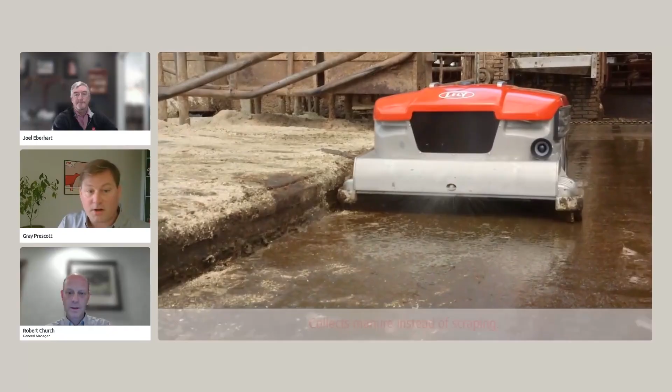Now, guys, I'm going to play a little animation because we're going to start by explaining how the collector works. I think a lot of people watching today are probably familiar with the collector, but in case someone's asking, what is a collector, what does it even do—Joel and Bob, feel free to join me here as I speak over this animation. I really want to give our watchers an idea of how the machine works.

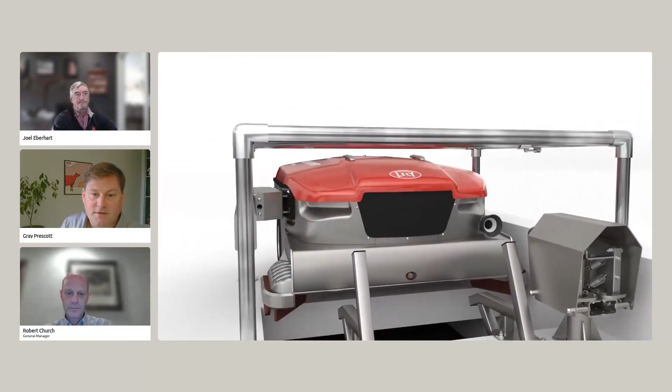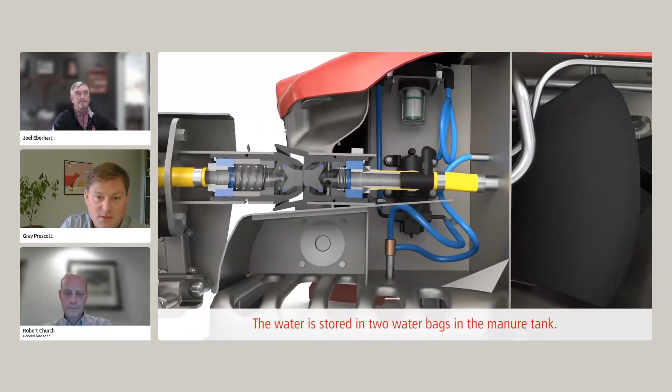Here we can see an animation of it coming into a dump hole, as we would call it—that's kind of home base for the machine. That's where it's going to charge its battery and where it's going to fill up its water bags. We can see it here docking with the water fill station, filling its water bags.

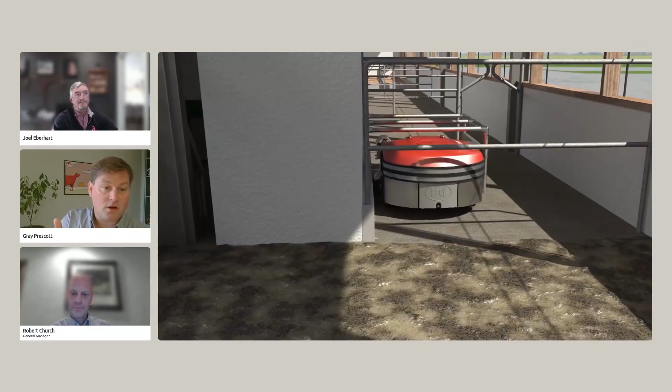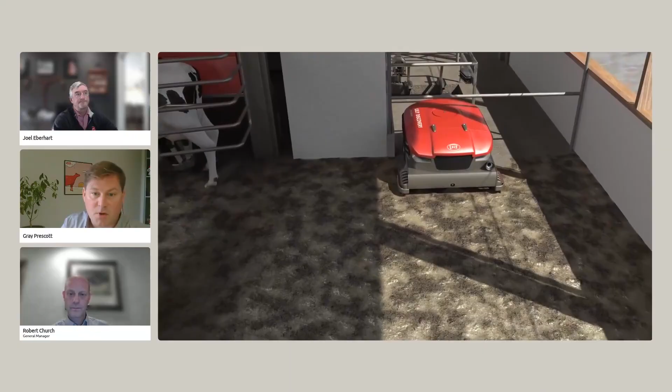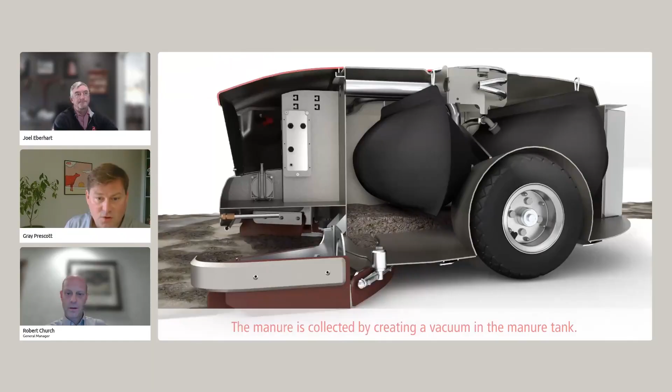As we see it drive through the barn, we're going to see it spraying water in front of it to liquefy any dry solids it finds, and spray behind it so the floor doesn't dry out between its trips through the barn. So the biggest difference we're going to see with the collector versus any other automated way of cleaning your barn is that this machine does not push the manure to the end of the barn into a hole—it drives and it picks it up.

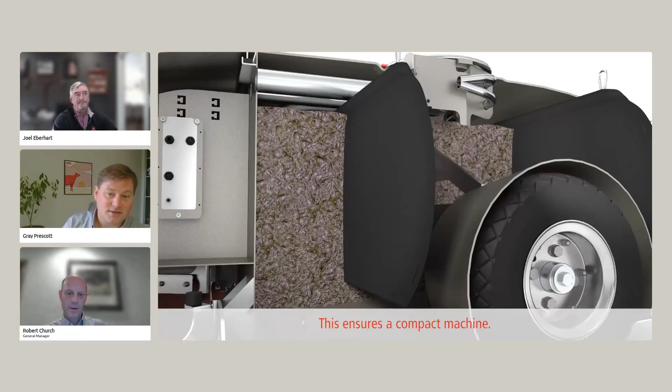That's what this animation is trying to get across. There could be manure in front of it, and after it goes by, there's nothing behind it, because that manure is in fact going into the tank. It's using a vacuum pump to hold the manure there, but the force coming from the drive wheels pushing into the manure is actually a lot of the force that collects it, right?

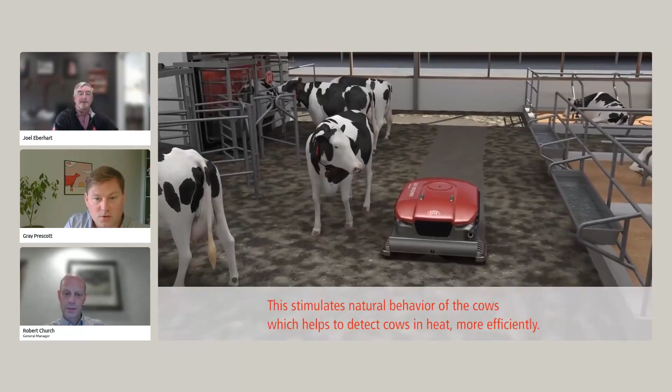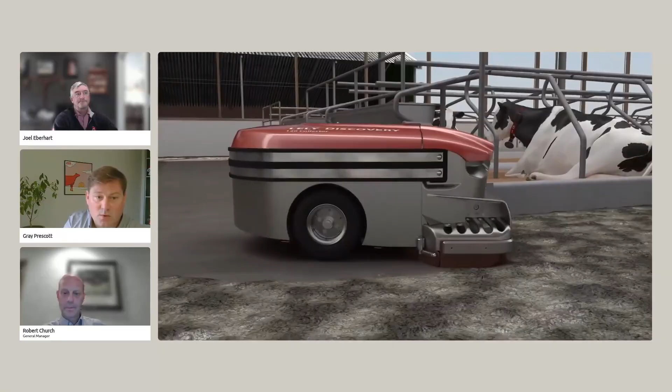We're spraying behind it. I thought there was value in showing this animation because, as you can see here, this collector is driving through an area with cows in it. Just like in real life, cows can stand there and let it go beside them, as opposed to a blade that's the whole width of the alley that's going to go down and disturb every cow that it passes.

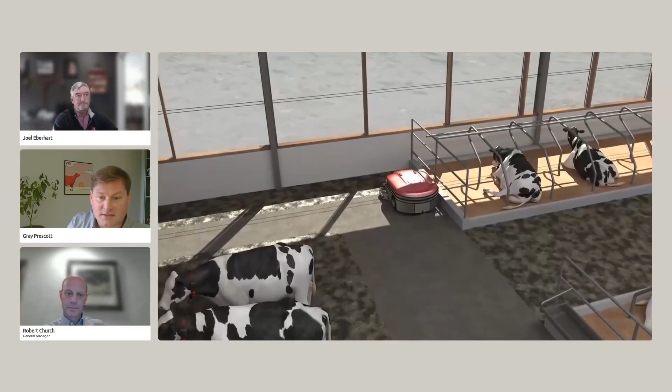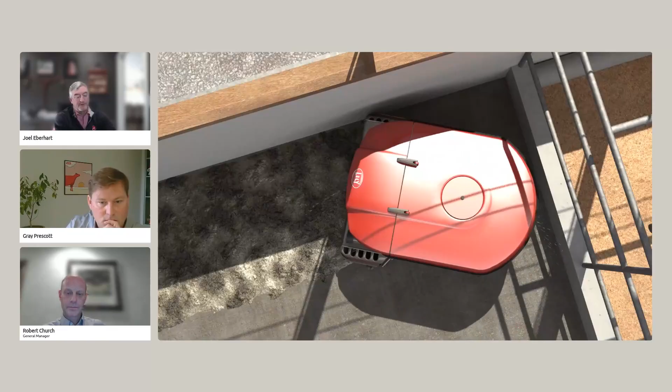I think that bears talking about too. Lely, in general, for the products we have in our portfolio for the dairy sector, we look at these things a little differently and design them such that it's through the lens or the eye of a cow. It is in there, living in their environment.

Bob, I don't know about you, but cows don't necessarily like loud, big, large things. So small things that are autonomous and can live in their environment, we think about those a little bit differently. It's something that's in our DNA, thinking about it not necessarily from a people standpoint, but from a cow standpoint.

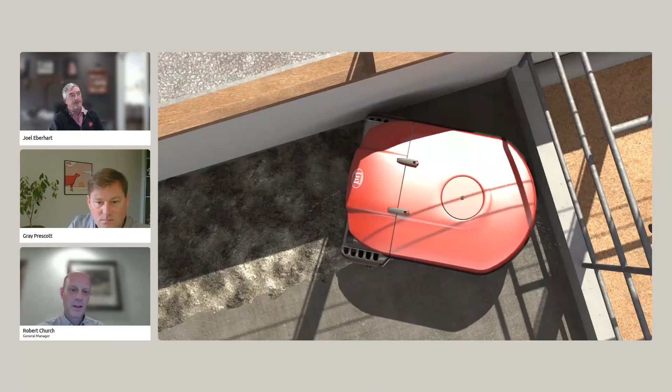Yes, Joel, you're spot on with that. The narrower width allows us to do some programming to keep it away from the headlocks during feeding time, and there are some advantages that a bigger machine wouldn't be able to work as well with.

And one more, and we'll talk over each other through the next hour, which is awesome. Everybody's got a lot to say, and there's some really cool things, but I think the first thing we talked about when you were explaining the features or benefits or topics we want to cover, Gray, and you did briefly hit on it in this narration, it's a vacuum technology.

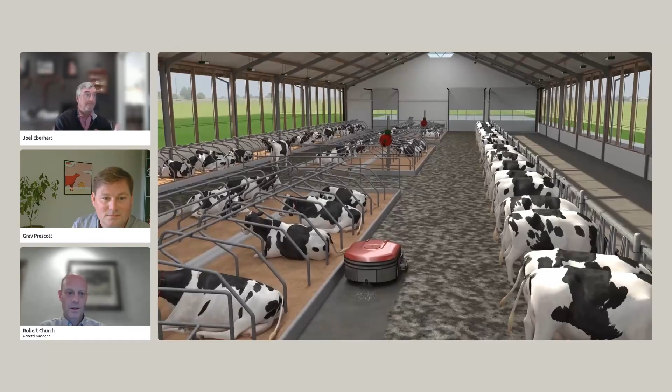We tried a lot of different technologies of gathering manure into a vessel, physical ways with beaters, bars, different ways of collecting, but settled on the vacuum as a gentler, easier way to get manure picked up. From a wear standpoint, it certainly has a bearing on the longevity of the collector, because the moving parts aren't touching the manure.

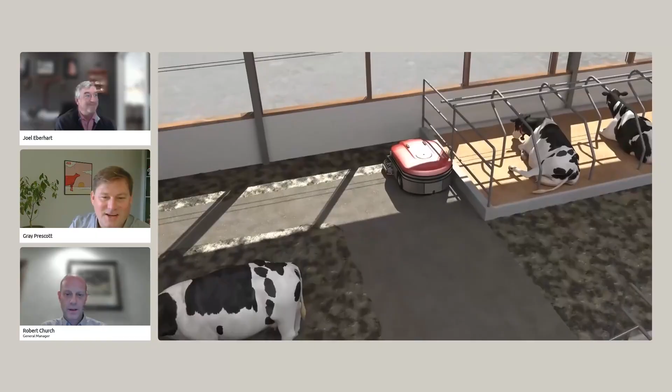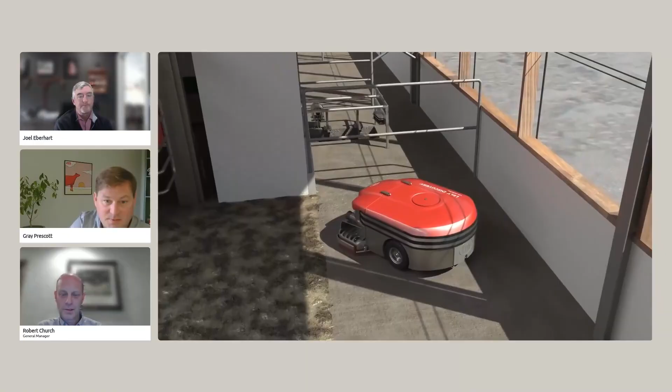Right on. Anyway, keep playing the video. We'll keep talking. The next good topic is it drives into corners, right? It has a flat front and a round back. My experience has been that it's pretty impressive at how well it cleans out the corners of the barn, actually cleaning every square foot where the cows live.

Bob, you visit a lot more farms day to day than I do. How have you found it to be in places like it just showed in the animation, when it goes into a corner? Yeah, as long as our bump stops are right and they're high enough, it does just as it showed. I've got a lot of barns where there's literally no hand scraping at all that has to happen.

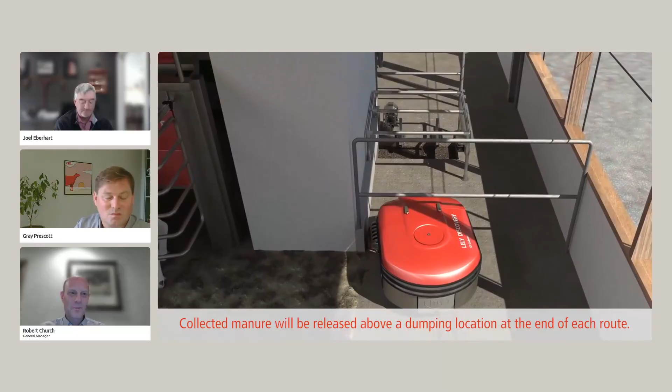With alley scrapers, there's always that little bit of scraping that has to happen at the end of the barns a couple times a day. Hopefully it happens a couple times a day, but we all know it doesn't most of the time. This just takes care of that.

When we first started them, I wasn't sure if it would still require some manual work in some of those tighter spots. So far, thank goodness for my guys that program them, they do a great job, and there's almost no hand scraping in these barns.

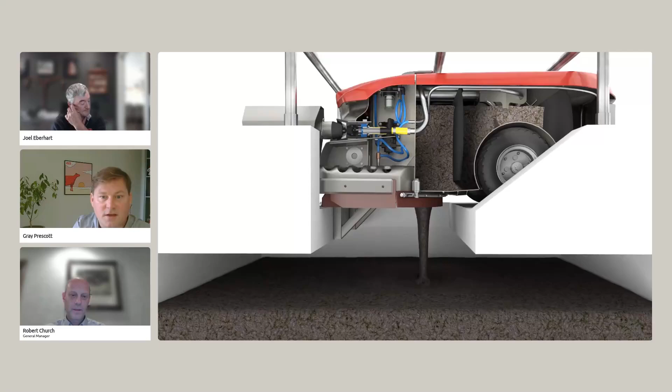I think that's awesome. And that's, to me, one of the biggest differences between the Lely Collector and any other way you might consider to clean your barn. To me, it's true automation, and it's very in line with the Lely philosophies for feeding and milking as well.

You can see here how it evacuates the tank. It simply turns off the vacuum pump. Luckily, gravity's always on, so out it goes. It sprays water behind it, trying to end up with an ideal level of moistness on the floor so that when it comes back around it can turn the manure and bedding into a slurry and pick it up.

So that's it for the animation. I just wanted to give some visuals for those joining who are new to the collector, because the three of us know the subject matter very well, and we're probably going to be talking really in depth about it.

So I wanted to go back and take that sky high view of it.

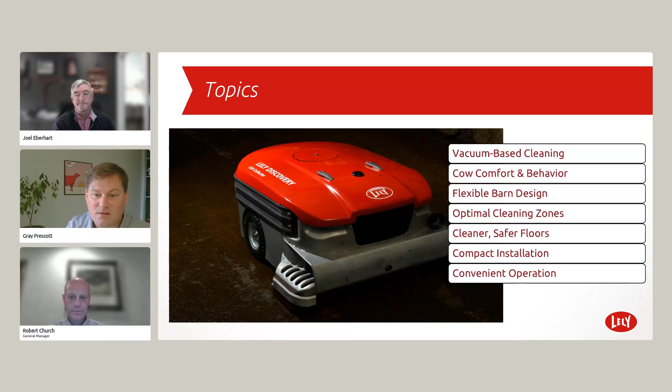The first one being vacuum-based cleaning, where we're talking about the real difference of actually picking up the manure and taking it out of the barn instead of pushing it all to one end.

How has it been in your experience, Bob, explaining that to new customers or potential customers? Is this idea kind of different than what people traditionally know, the tried and true scraping, whether on a tractor or with an automatic scraper? Here we're going to a different approach. How's that received?

Yeah, it's been received well. We did a couple startups, and guys would ask me, do we start up the milking robots, do you want the collectors running? The first time I said, no, I don't think I do, let's not get too crazy. Then the second one I did, I said sure, turn them on. Worst case scenario, we'll turn them off, right, if the cows go freaking out.

But that never happened. The cows didn't really react, they just kind of walk around them and sniff them and lick them like cows do. We turned them on right at the beginning, and they're still running today. So I was surprised by that. I thought maybe the cows would bunch down at the end of the barn or something like that, but it didn't happen. Now I want them running every startup.

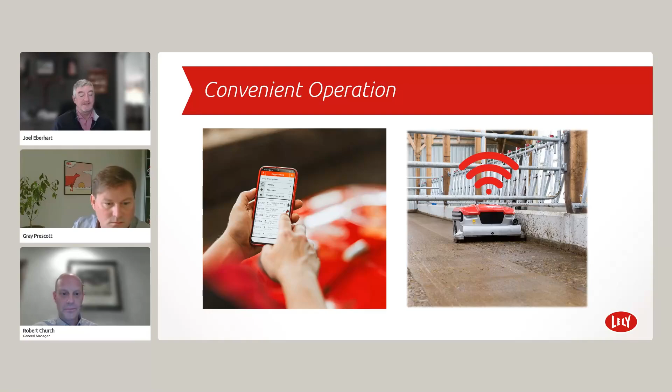Here's a good one: if it sucks up shavings or feed, does it get clogged easily? I haven't seen that happen very much. I'd say long straw or something like that would be a problem, but with shavings I haven't seen any issues, and I haven't heard of any problems with that either. We've seen about everything, but that's right.

That applies to all different kinds of materials, whether it's sand, wood shavings, or newspaper - all kinds of things as long as it meets that size criteria. In my opinion - I don't know what you think. Yeah, I agree completely. The only thing I've seen problems with is cow cleanings. Yeah, they do that - don't do that. It'll suck that up, and it doesn't always come out easy.

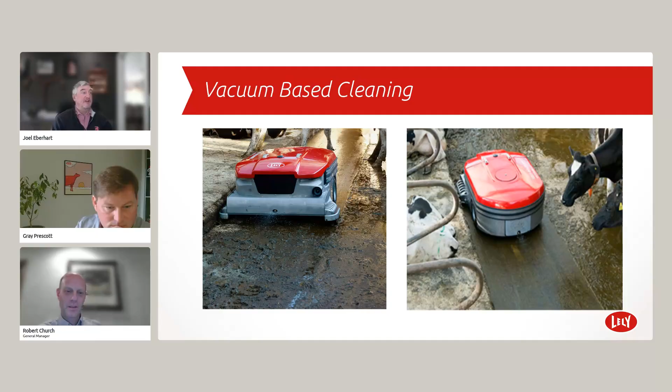So I think we covered the bedding material, sand, and power. Power is just really only 110, 120 volts, right? Because all we're doing is charging a battery.

We have ambitions to cover details of the installation. I'd say it's a compact installation, but in addition to the size requirements, the power and water requirements are important to producers too. Bob, these pictures are both projects of yours, right? Lamar Farm, yeah, they look familiar to me anyways - let's put it that way. What did these guys need?

So looking at the one on the left, it's the C2, the newest version with wireless charging. What did the farmer need to provide to set that collector up? Well, this was partly a new barn construction, so we had the perfect scenario to do the installation. When we spec'd it out, we had a water line that feeds that header tank, and that becomes the water fill for it, so it fills the collector from that header tank.

So your water line, I'm guessing, doesn't have to be high flow. No, we're trying not to - it's just a pretty small line actually going in because it's got plenty of time to fill. And then the electric power, I think it's a 30 amp breaker we're putting it on, and it's 110 volts, and it just charges.

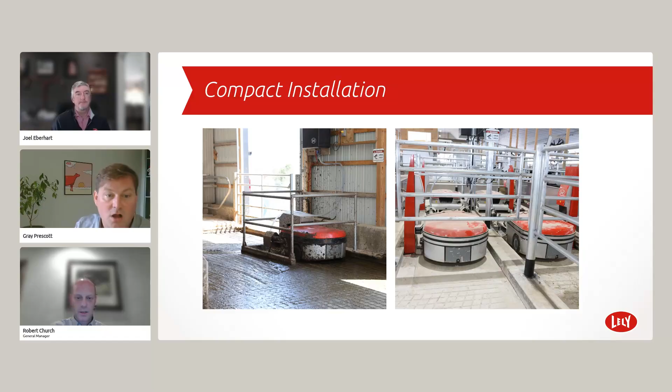So I think that ties into our flexibility on barn design too. Any manure that gets picked up by this thing has to end up back in a spot where the machine can dump. So we talk about flexibility in barn design, which is kind of two-fold: one in the way the machine can navigate, and also in what it requires for space, power, and water to be installed.

Bob, I really would like to hear your perspective on how the collector expands the world of barn design, or not. I don't want to be leading the witness - what's the impact of the Collector 120 on how you go about designing a barn with your customer, or helping your customer make those decisions?

Yeah, so I guess anybody that knows me knows that I'm a cow guy and a labor efficiency guy. Those are two things that are first and foremost on any of my designs. One of the things that historically we've always done is have a straight alley that you drive in one end and out the other in a freestall barn. It makes cleaning easy, quick, and efficient.

The challenge is that really limits your ability to locate milking robots or sort gates or any of that equipment, because you don't want to block that alleyway. The beauty of the Collector is that it will navigate through that maze of stuff in the middle to get to the other end. That's just programming, and it really opens it up so you can maximize the labor efficiency of that barn without sacrificing manure efficiency, because you eliminate the hand scraping.

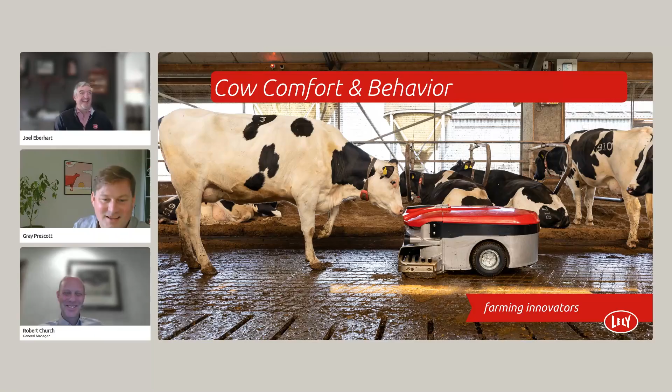This one ties in a little bit to exactly that. So I've got cow comfort and behavior, but also optimal cleaning zones - the two go together. Because this machine doesn't clean the whole alley at once, that contributes to cow comfort and natural behavior because they can walk around it. They don't have to go to the end of the alley and over the crossover, they can just go around it. But on top of that, it means we can clean not the whole alley the same amount of times.

We're in a robotic milking barn - we're not milking all the cows the same number of times, and we don't need to clean everywhere in the barn the same number of times. The reason I chose this particular picture is we can see the collector going behind the free stalls - that's a place we have to clean a lot. Meanwhile, we see cows standing at the feed front doing what we like to see - eating food, filling their bellies. Here their alley is getting cleaned and they're not being disturbed.

Yep, that's what we see. How often do you clean behind the free stalls versus in front of the feed front? Oh yeah, double the amount. Because there's hardly any manure up by the feed front - it doesn't need cleaning nearly as often, and it's a disturbance point, because hopefully there's always some cows eating there. There's not a ton of manure there, so you don't need to clean it that often. By the free stalls, though, absolutely.

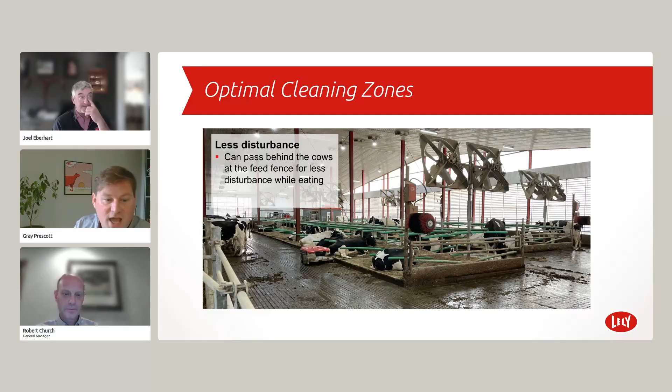Versus when we have - I don't know if I dare show that - a blade going all the way across the alley, at some point they have to cross it. Right, and if they're new, they've never seen one before, they might go the other way, like we were talking about. Once they get used to it, they're pretty fine - they go over the scrapers, no problem. To do that, though, they're going to walk through what we call the wave.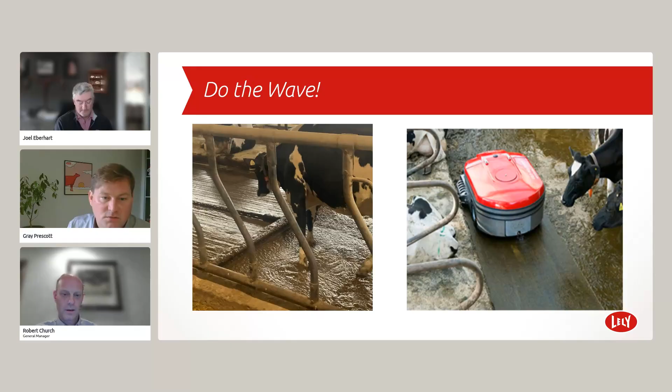Joel, I'll ask you and Bob both - how have you guys noticed that switching from the picture we see on the left to the picture we see on the right contributes to health outcomes for the cows?

I don't know if I have a true metric measure for it, but I'm pretty confident that cleaner cows are healthier cows. I do see less hoof issues for sure with a cleaner floor. If there's one thing that many people have told me, it's that their hoof trimmers are saying the cow's hooves are a lot harder. I've heard that multiple times, and just in general, a cleaner cow is going to be a healthier cow.

Yeah, I would agree with that too. When you showed the picture of the wave, you've got manure that's up over the ankle, up over the dew claw, ends up being drug into the cubicle or under the mattress, into the sand. When they go to lay down, it can end up on the teat ends.

We're definitely seeing an impact on that. Can we firmly say that we're having a big impact on this kind of mastitis or that kind of disease? I don't know, I think we're doing some research on that as we speak. But what you just said, Bob, a cleaner cow is definitely healthier in a lot of respects, and we definitely see a lot less of some of those environmental things that we had seen in barns.

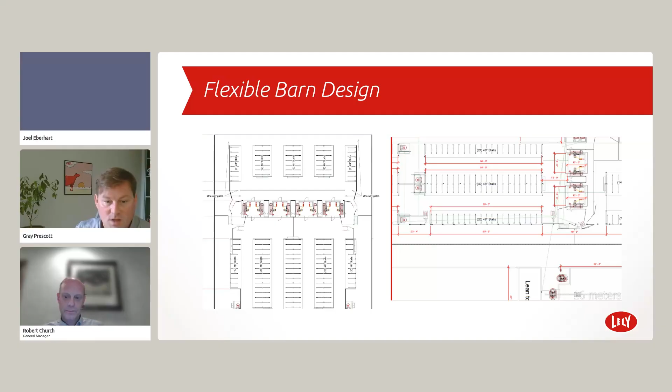So how many collectors? We'll switch to question time. How many collectors do you need to service your barn? How many square feet can each collector cover? So, one of us can handle that, I'm sure. I know what I would say. What do you tell customers?

So what I would say is there's a little bit of engineering that goes into this, right? We're pretty particular about calculating out the routes and the plan of how we're going to lay out collectors in somebody's barn. We want to make sure we're not under capacity, because that's a really bad problem to find out afterward. So we don't use default numbers. In our case, and I think every dealership should be doing the same exact thing, they should be running the calculations to come up with that answer, because for every barn it's a little bit different. Sometimes that difference means you need 2 instead of 1, or 1 instead of 2. You don't know that until you go through the actual exercise of calculating it out. So that's how we handle it here.